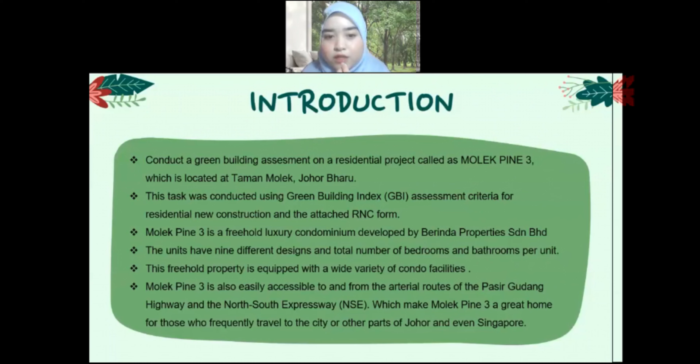Molek Pine 3 is also easily accessed to and from the arterial routes of the Pasir Gudang Highway and the North-South Expressway (NSE). This makes Molek Pine 3 a great home for those who frequently travel to the city or other parts of Johor and even Singapore.

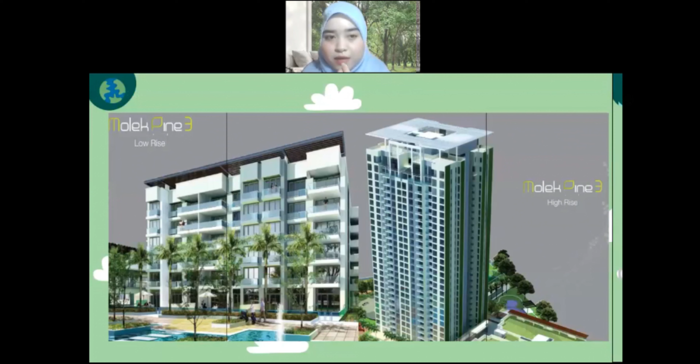This is the picture of Molek Pine 3. It has 2 types, which is low rise and high rise. Okay, that's all from me.

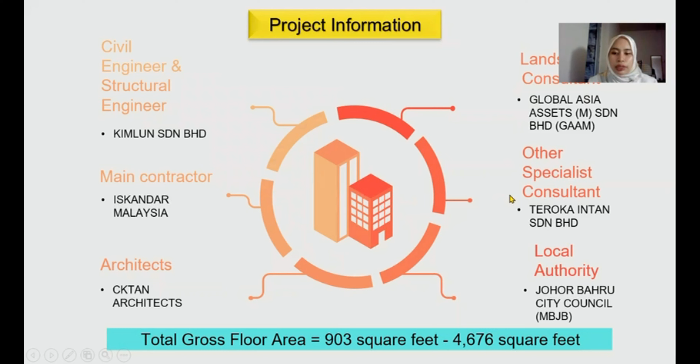The total gross floor area for Molek Pine 3 project is 903 square feet till 4,676 square feet. So this is the building description.

Molek Pine 3 is a freehold luxury condominium situated along Jalan Molek in Taman Molek, Johor Bahru, Johor. This property is a development by Berinda Properties Sdn Bhd, a Malaysian-based premier property developer with more than 40 years in the property industry. Molek Pine 3 has a total of 248 condominium units with built-up ranging from 903 square feet to 4,676 square feet.

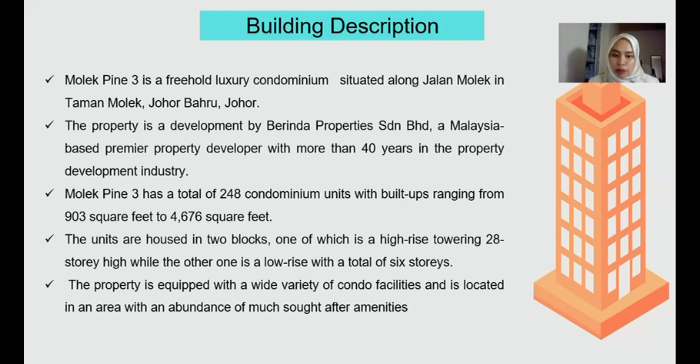The units are housed in 2 blocks, one of which is a high-rise towering 28 stories, while the other is a low-rise with a total of 6 stories. The property is equipped with a wide variety of condo facilities and is located in an area with an abundance of much sought-after amenities. So this is overall point score.

For the energy efficiency, the maximum point is 23, but we get score 20. Indoor environmental quality, 9. Sustainable site planning and management, 36.

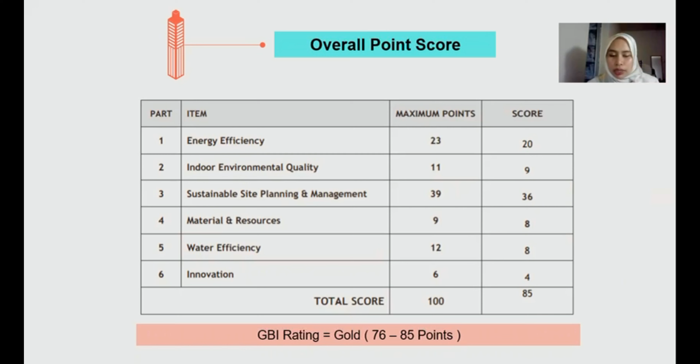Material and resources, 8. Water efficiency, 8. Lastly, innovation score is 4. So the total overall score is 85. The GBI rating for this project is gold. That's all from me.

Thank you. My name is Jabesh Talan. Today I am going to present part 1 and part 2 of project-based learning Molek Pine 3. First is energy efficient. There are 5 areas of assessment under this part, which is minimum EE performance, renewable energy, advanced EE performance based on OTTV and RTTV, home office and connectivity, and sustainable maintenance.

Next, as we can see, this is the EE form. Item number 1 is minimum EE performance. Maximum score for this is 3, and this building got full score. Number 2 is renewable energy. Maximum score is 5, and this building got 4.

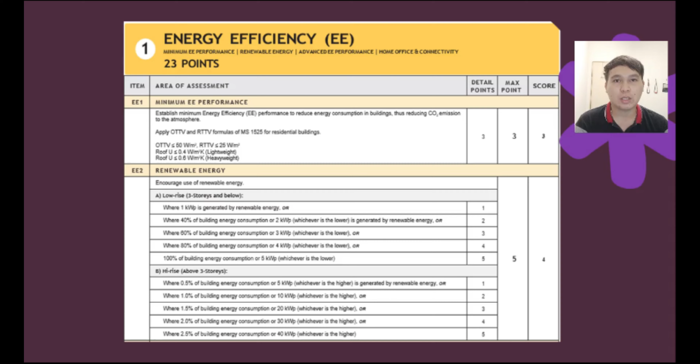Number 3 is advanced EE performance based on OTTV and RTTV. OTTV stands for overall thermal transfer value, and RTTV stands for roof thermal transfer value. This building scored 8 out of 10.

Number 4 is home office and connectivity. The score of this is 2 over 2. Number 5 is sustainable maintenance, and the score is full mark, 3 over 3, and the total score is 20 over 23.

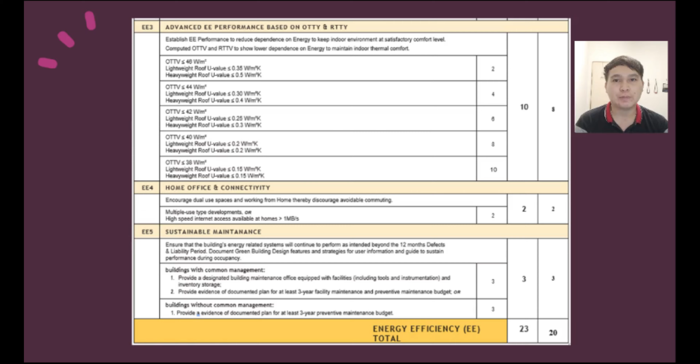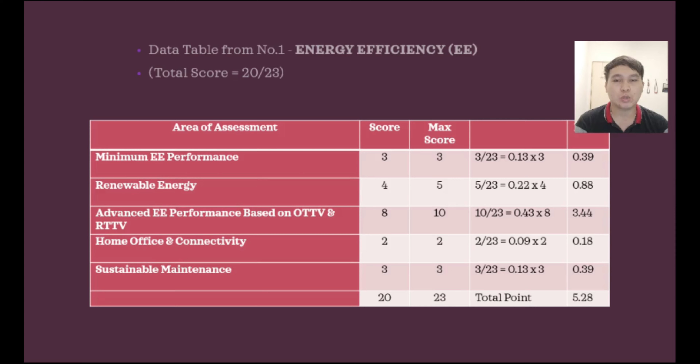Next is part 2, indoor environment quality. There are 7 areas of assessment under this part, which is minimum IAQ performance, daylighting, sound insulation, good quality construction, volatile organic compound, formaldehyde minimization, post occupant evaluation verification.

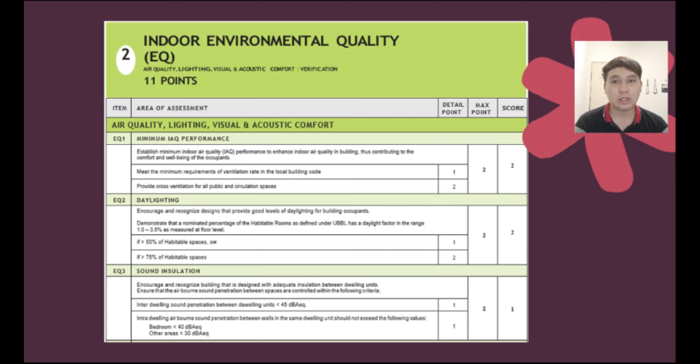This is the indoor environment quality form. As we can see, this building got full score, 2 over 2, for minimum IAQ performance and daylighting. IAQ stands for indoor air quality. For sound insulation, it scored 1 over 2.

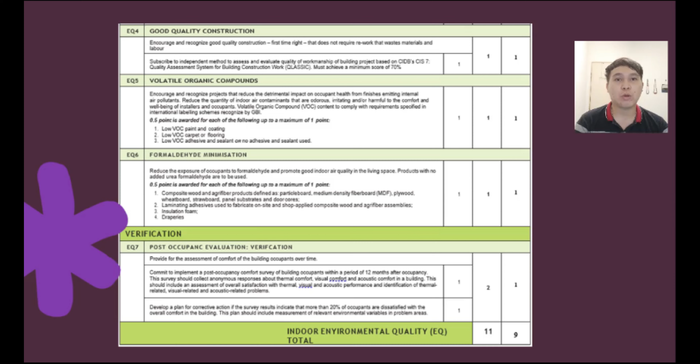Next, this building got 1 over 1 for good quality construction, volatile organic compound, and formaldehyde minimization. Lastly, it scored 1 over 2 for the post occupant evaluation verification. This is the data table of part 2, and the total point of this part 2 is 1.35. That's all from me.

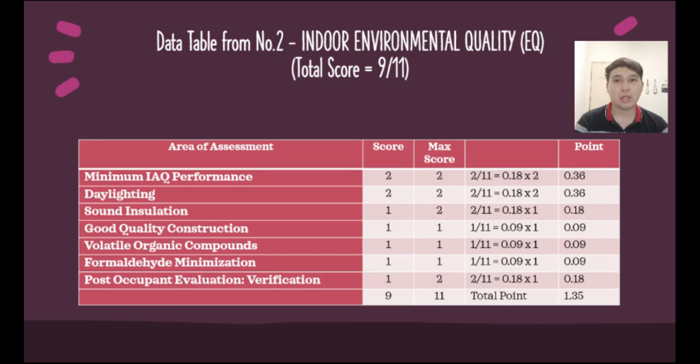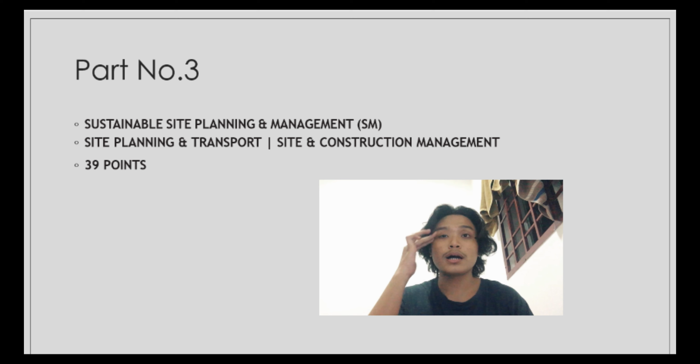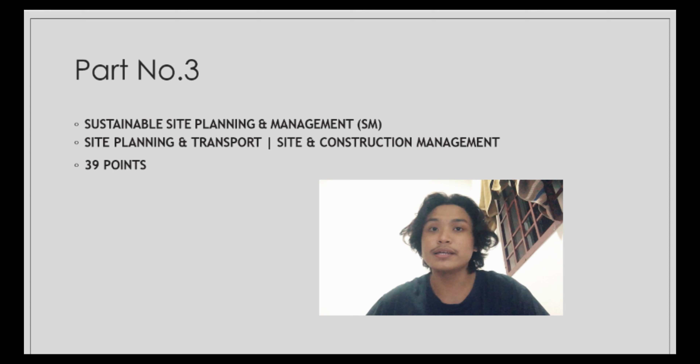This we call SM, or site planning and transport, and site construction management, which is total point 39. So we go through the form, and from this form I choose number 1, because they have the proposal building must complete with the following requirement. And then SM number 2, which is public transportation access, I choose the same point, which is 12.

I chose score as average of point of our residential unit in the residential area as SM2A. Same as car park provision, for at least 20% of total number of residential units, not more than 250 meters from the terminal.

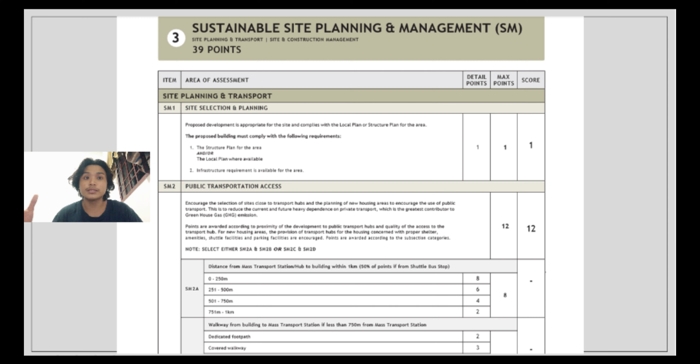For SM4, open space, landscaping, and heat island effect, I choose 3 points, because they have a provision of additional similar landscaping for every extra 5%.

For SM5, construction system and site management, I choose 2 points because for CIDB, IBS score is more than 70%.

And then we go through SM6, which is stormwater management. I choose 2 points because exceeds MSMA requirement by 30%.

And then we go through SM7, redevelopment of existing site and brownfield site. I choose full mark, which is 4 points.

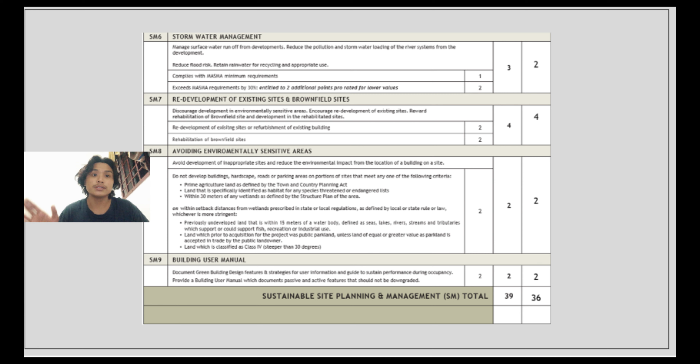And then SM8, avoiding environmentally sensitive area, I choose same format, 2 points.

And then SM9, building user manual, I choose same 2 points.

So total overall for sustainable site planning and management, SM, total I choose 36 because overall of this mark is 39.

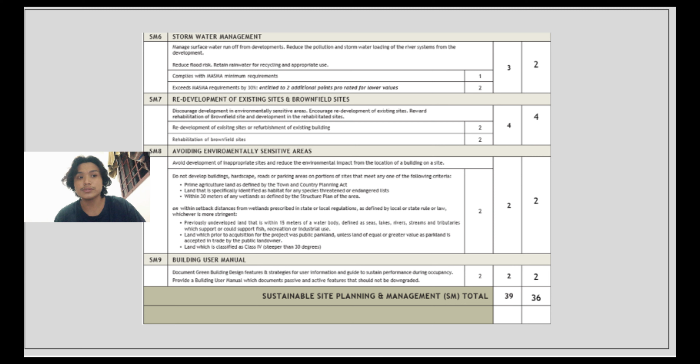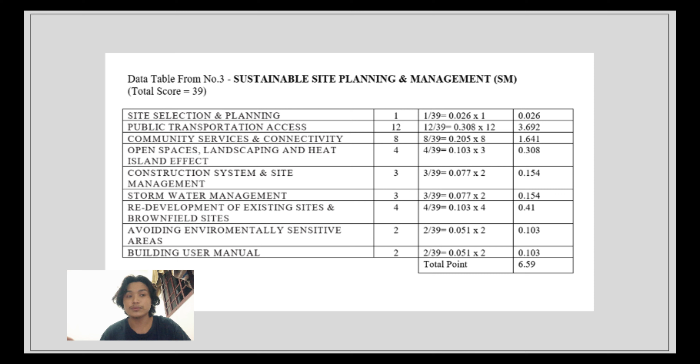So we go through the data table number 3. This is the data table, the formula to get the actual total point, which I got as 6.59.

So we go through part number 4, which is material and resources, or short form MR, resource and recycled material, sustainable resource, and overall total is 9 points. So we go through the form.

For MR1, storage and collection of recyclables, I choose 2 points. MR2, material reuse and selection, I choose 2.2.

MR3, construction waste management, same, I choose 2 points because they have a quality of measuring total tonnage of waste or truck load of the waste disposal.

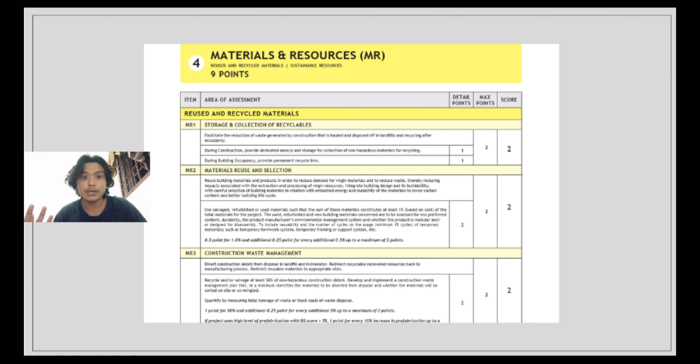So we go through MR4, recycled content material, same, I choose 1 point. But regional material I choose 0 because they have no increased demand for building material and product that are extracted and manufactured within the region.

Meanwhile, for MR6, sustainable timber, I choose the same format, which is 1 point.

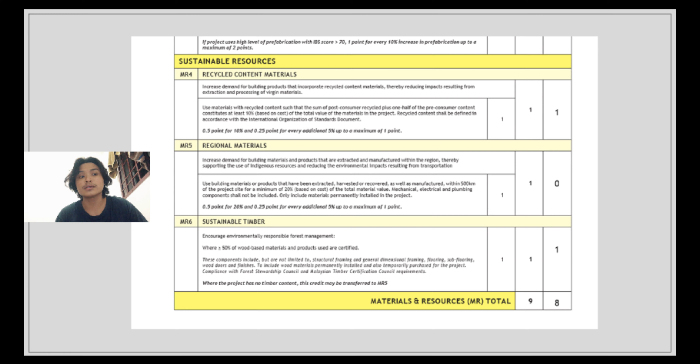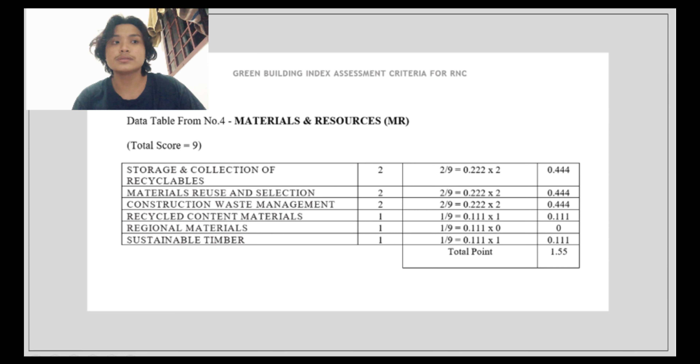So total for material and resources, I put 8 points. So we go through the data table, same as data table number 3, and for overall actual total point, I put 1.55.

So that's it from me. Thank you.

And I want to present my part 5 and 6. My name is Mohd Shaharuddin. So I'm going to talk about my part 5, that is water efficiency.

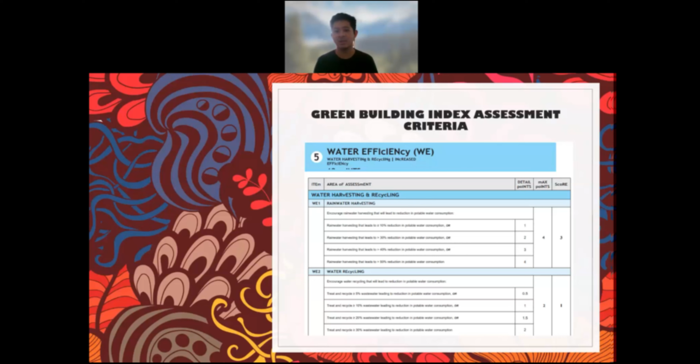Water efficiency, the first point is rainwater harvesting, which encourages rainwater harvesting that will lead to reduction in potable water consumption. In this form, they have 4 points, so the maximum point for rainwater harvesting is 4 points.

Next point is about water recycling, which encourages water recycling that will lead to reduction in potable water consumption. They also have 4 points, and the maximum point is 2. So the score for our project Molek Pine 3 is 1, which is about treating and recycling same or more than 10% wastewater, leading to reduction in potable water consumption.

The next point is about water efficiency landscaping, which encourages the design of a system that does not require the use of potable water supply from the local water authority. They have two main points and the maximum point is 2. So the score is 1, which is reducing potable water consumption for landscape irrigation by same or more than 50%, for example through use of native or adaptive plants to reduce or eliminate irrigation requirement.